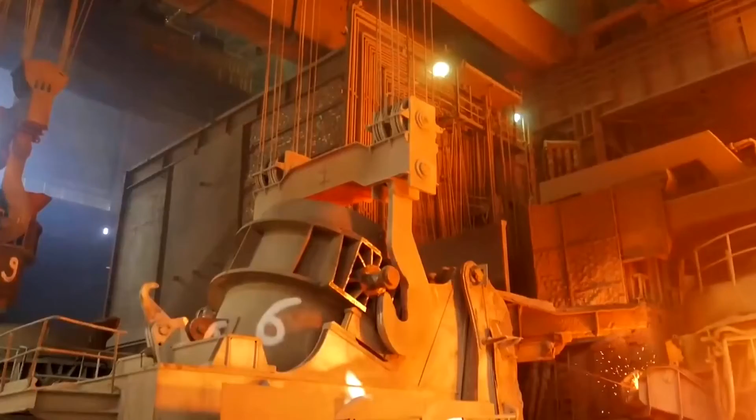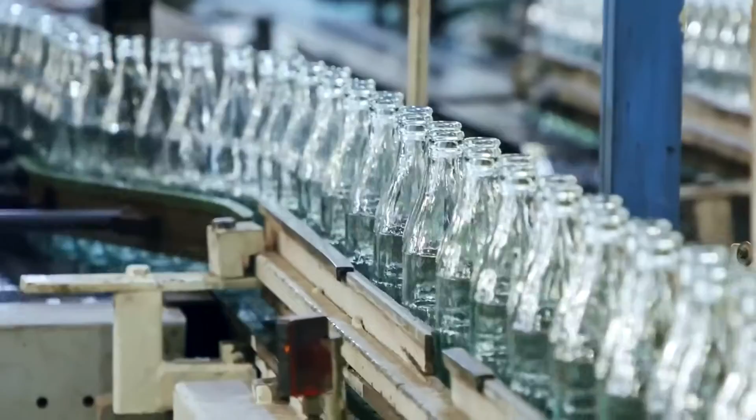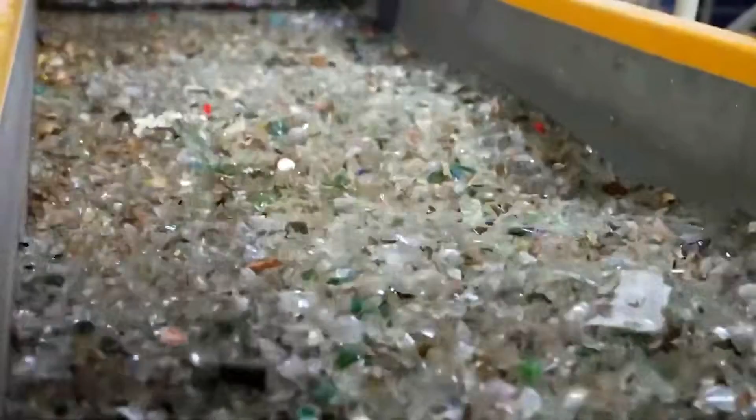But this material holds a remarkable potential. Glass can be recycled an infinite number of times, reborn again and again, without any loss of quality or purity. The process transforms a chaotic jumble of broken fragments into clean, shimmering new forms.

To understand how, we venture into one of the world's largest glass recycling plants. Within these walls, hundreds of tons of glass are given new life each day, revealing the incredible journey of one of our planet's most sustainable materials.

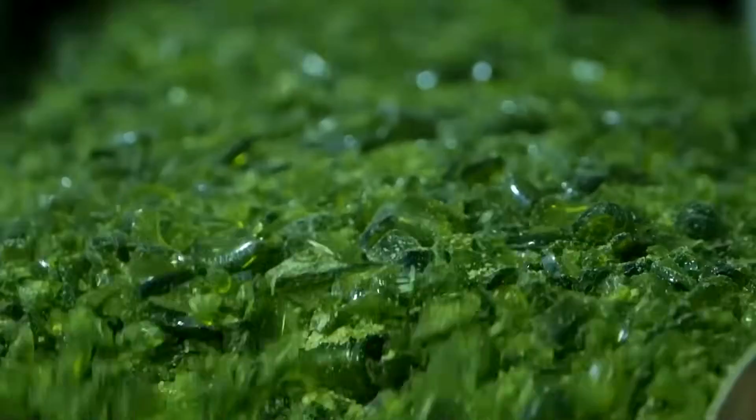It begins not in a factory, but on a city street corner. A single empty bottle, its journey far from over, is placed into an automated return machine. Across many European cities, this system elegantly solves the costly problem of sorting glass from household trash.

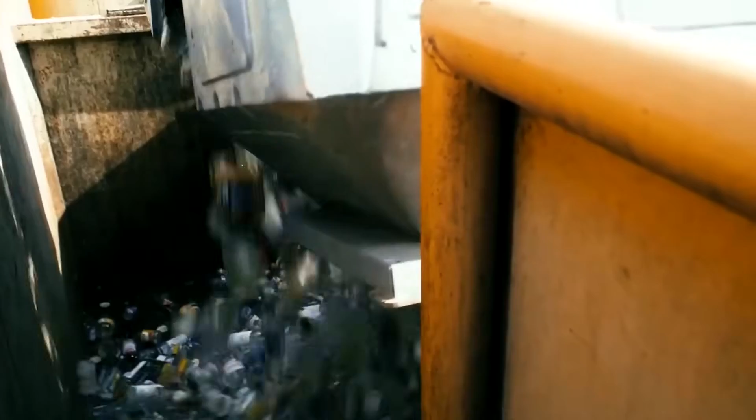The machine scans each container, sorts it internally, and issues a small refund, usually between 10 and 20 cents per bottle. A freshly finished drink is instantly transformed from potential waste into a valuable asset, creating a powerful incentive for public collection. This approach delivers a steady stream of pre-sorted, clean, and remarkably consistent glass directly to the recycling industry.

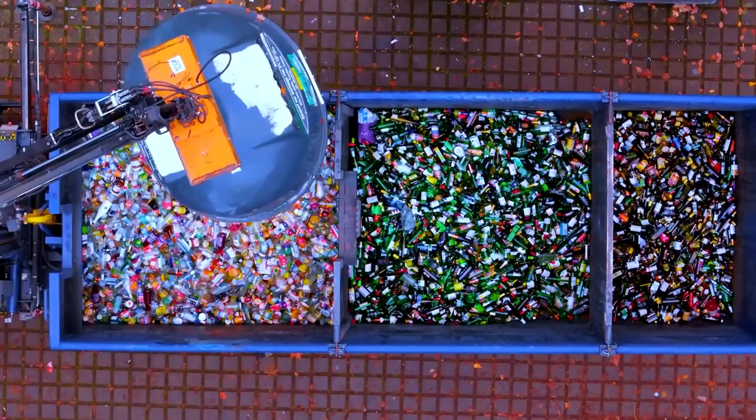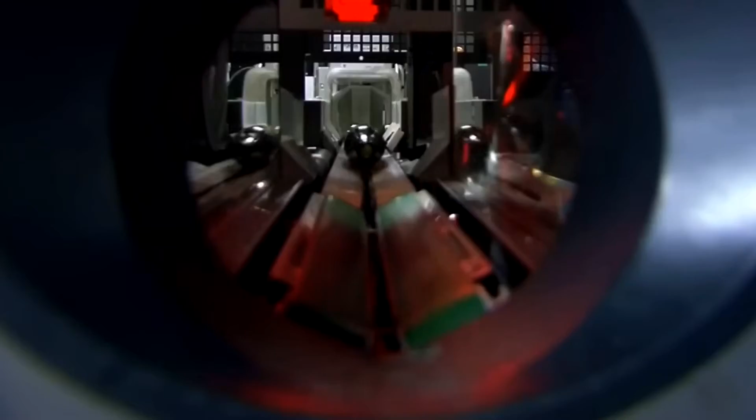Once these reverse vending machines reach capacity, specialized trucks are dispatched to collect the contents. Using forklifts, crews load large plastic bins, each one brimming with thousands of empty glass bottles, onto the truck beds. A single full-size vehicle can carry a payload of 20,000 to 30,000 bottles, a weight of about 10 to 12 tons of raw material.

Loaded with their fragile cargo, the trucks make their way from supermarkets and urban collection points to the recycling plant. Upon arrival, the drivers back up to a vast storage bay and release their load, sending a cascade of glass tumbling down onto the concrete floor. In moments, colorful mountains of green, brown, and clear glass begin to form, sparkling under the facility lights.

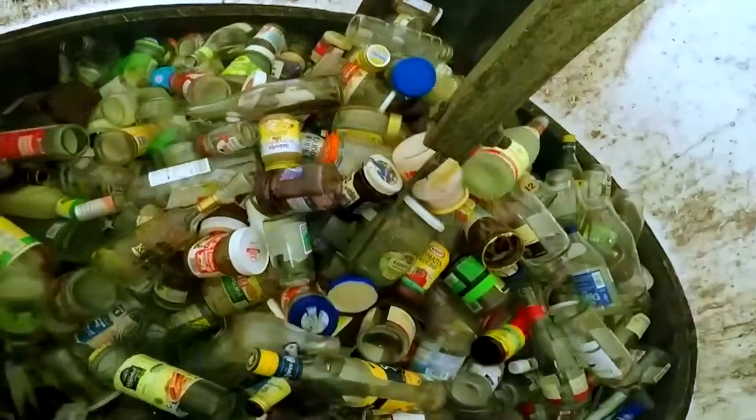These piles are not an endpoint, but the very genesis of the entire recycling chain. A raw material supply waiting to be cleaned and crushed. A mountain of discarded color and light awaits its violent rebirth. From towering piles, massive loaders carve out their share of the waste glass, hauling their heavy burdens across the yard.

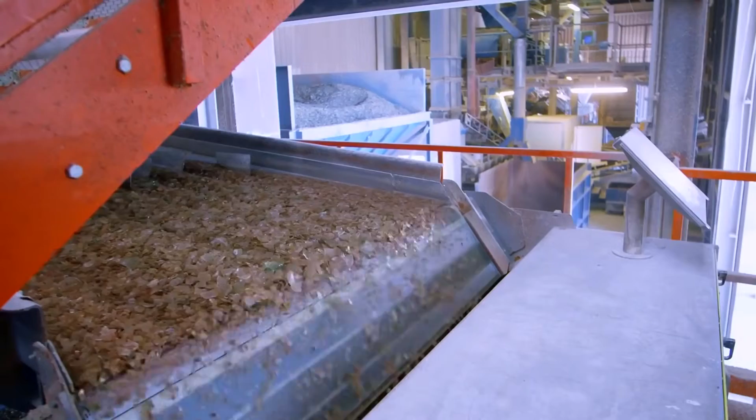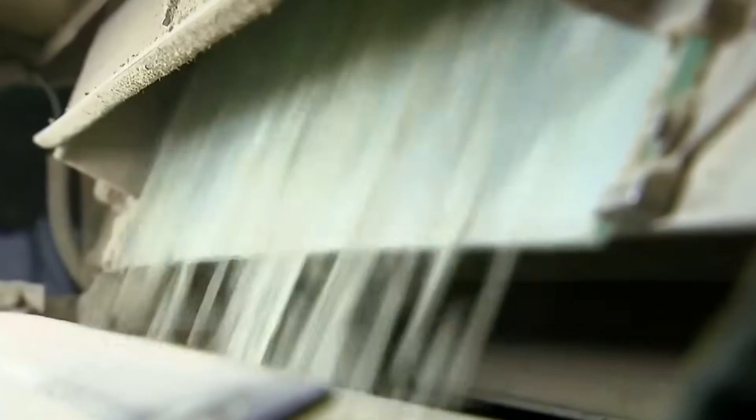The journey begins with a deafening roar as the glass cascades into the plant's feed hopper, sending a river of shards onto a steel conveyor. This stream of glass, dirt, and sand travels deep into the facility, where its first trial is a vibrating screen. Powerful oscillations shake loose the finest particles of dust and grit. Although the glass emerges cleaner, larger contaminants remain stubbornly mixed within the flow, requiring a different approach.

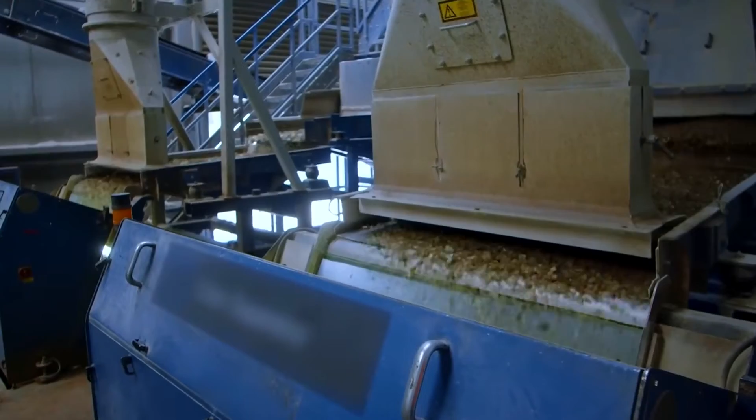Here, human hands take over where the machines cannot. Workers stand along the conveyor's edge, their eyes trained to spot and remove stray pieces of paper, plastics, and other foreign materials. This synthesis of mechanical screening and manual effort yields a purer batch, ready for the next stage.

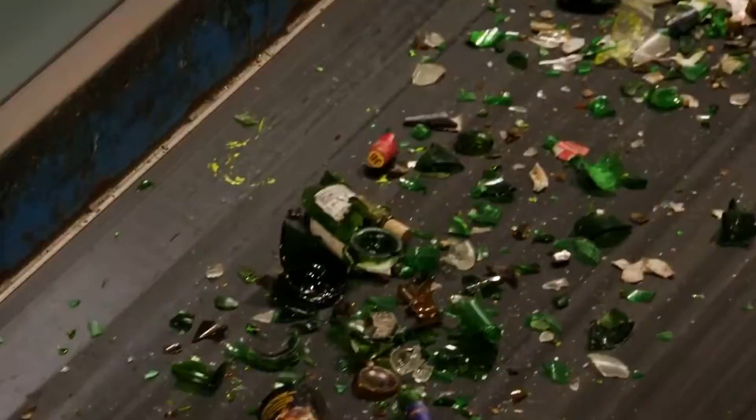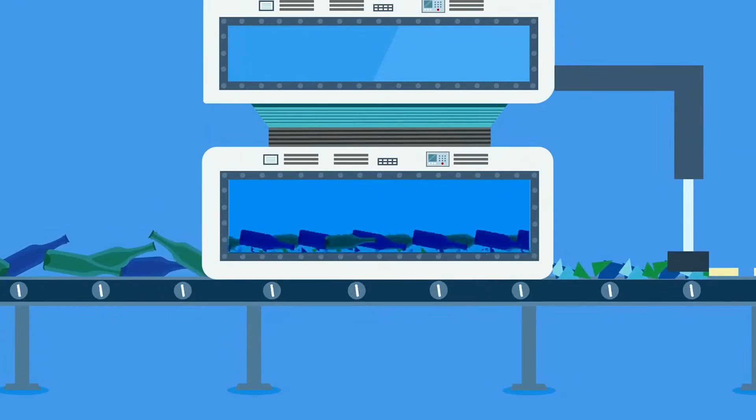But a more subtle impurity still hides among the fragments: countless metal bottle caps. A high-powered magnetic separator provides the solution. Its invisible field plucks the bits of steel from the stream as the glass tumbles onward, leaving the material approximately 80% clean. From here, the glass moves toward a crucial transformation.

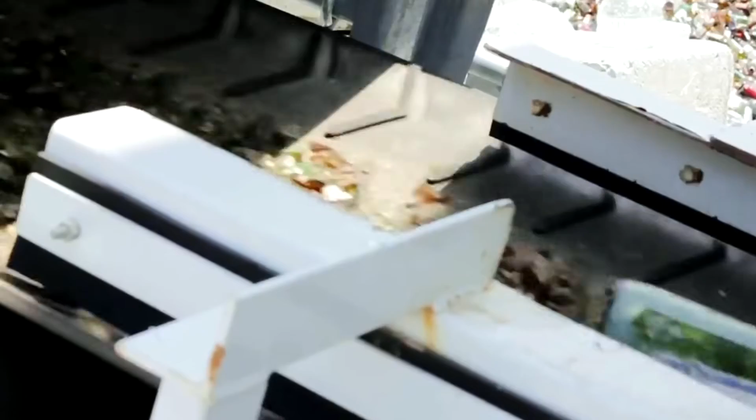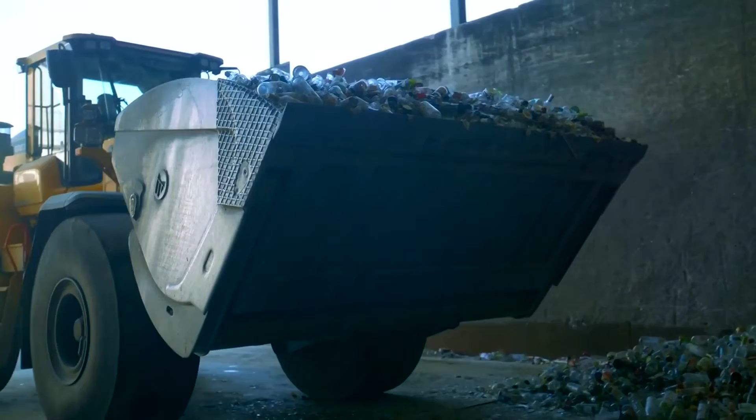Larger pieces are fed into a hammer mill, a colossal machine where high-speed rotating hammers smash the glass relentlessly, reducing it to tiny fragments. Any piece that remains too large is automatically detected and cycled back through the mill until it reaches the proper size.

This process ensures a uniform flow of fine, sparkling particles known as cullet, which looks almost like man-made sand. By breaking the glass down so small, it can melt much faster in a furnace, saving up to 40% of the energy compared to using raw materials.

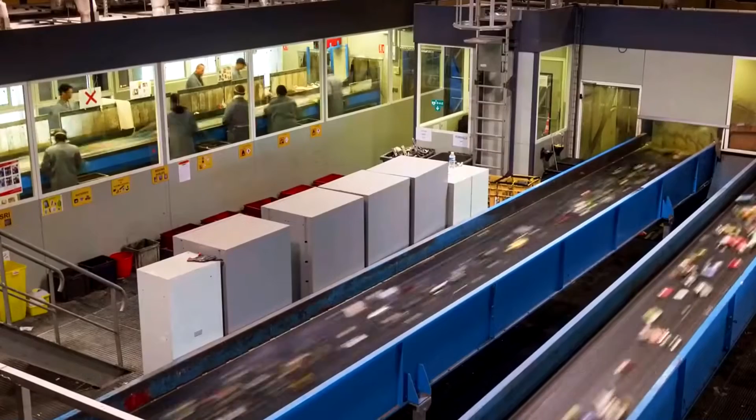The cullet is then carried into a powerful suction system, where it is blasted with a strong current of air. This airflow effectively strips away and blows off any lingering fragments of paper labels, polishing the material even further. Finally, the cullet enters the optical sorting system, the most precise step of the entire operation.

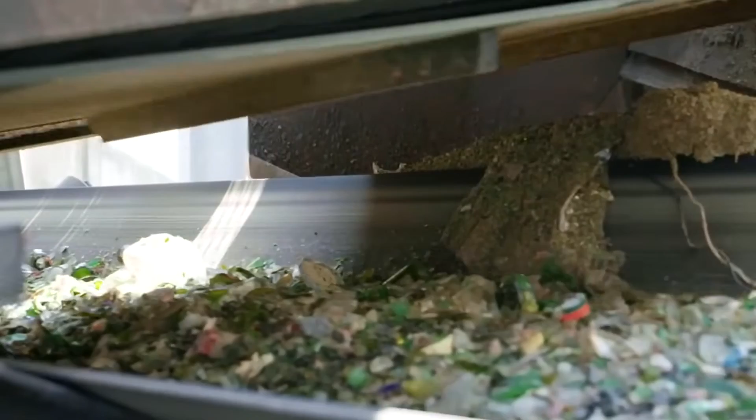As the glass pours downward in a shimmering cascade, laser sensors continuously scan each tiny fragment, identifying its exact color and composition. The moment a shard of brown glass, green glass, or even a stray piece of ceramic is detected, the system fires a precise puff of air, shooting the unwanted particle into a separate stream.

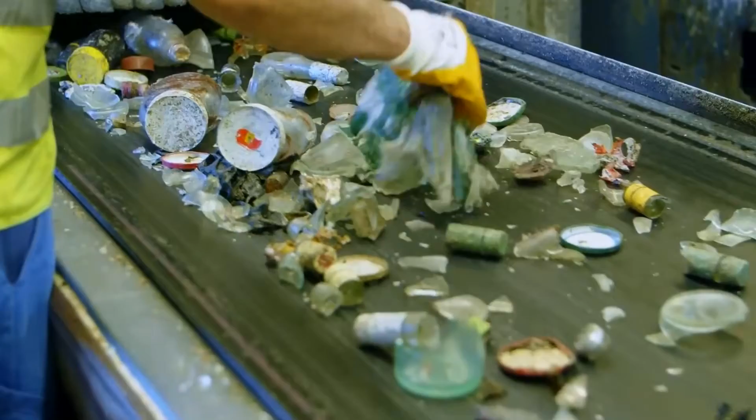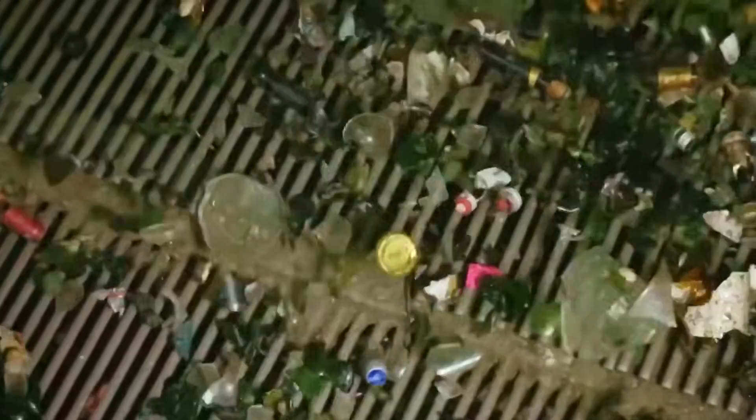The speed is astonishing, with tens of thousands of pieces processed every single minute, ensuring the cullet is sorted by color with near-perfect accuracy. Once sorted, the tiny glass particles continue along the conveyor belt. They are directed into separate storage areas, divided by color, where they form massive stockpiles. There they wait, glittering mountains of material ready to be transformed into brand new glass bottles.

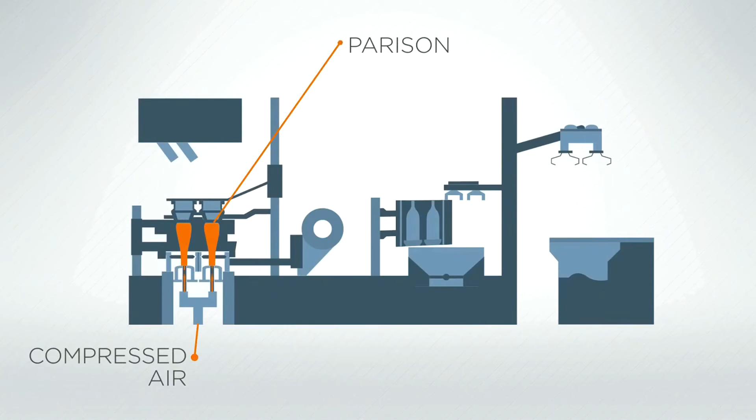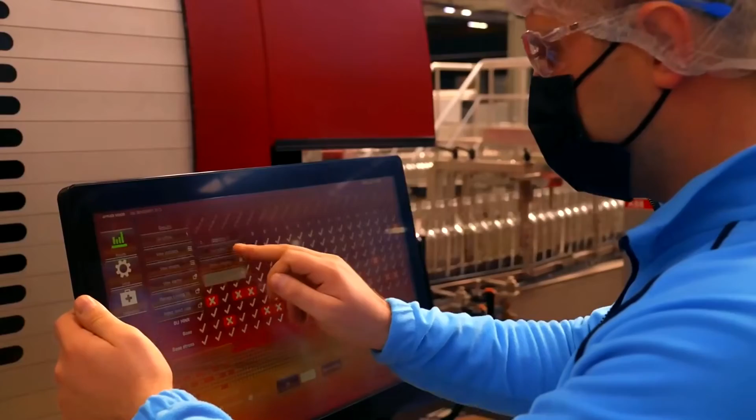It is a substance born of sand, yet it cannot be made from sand alone. Before these ground fragments, known as cullet, can enter the furnace, they must be carefully blended with other raw ingredients. The foundation of the mixture is pure silica sand, the element that grants glass its signature clarity. To this, soda ash or sodium carbonate is introduced, a key component that lowers the melting point and conserves energy throughout the entire operation. Limestone joins the blend as well, lending strength and stability to the final formed glass.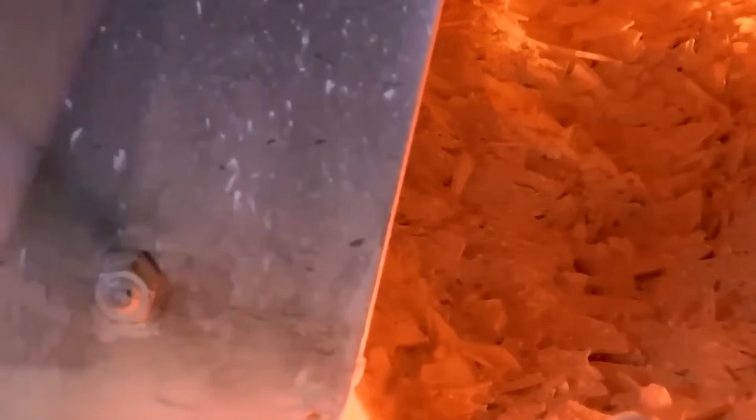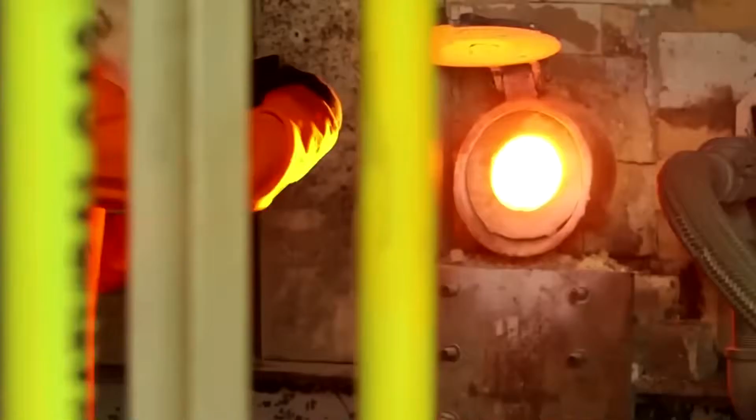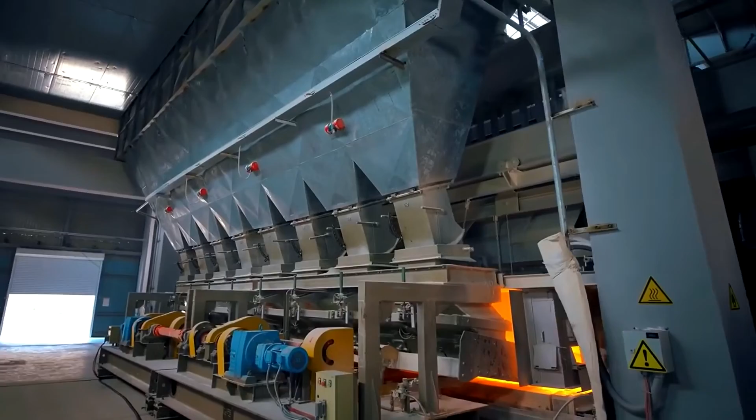Depending on the desired formula, manufacturers might also add dolomite, alumina, or metal oxides to fine-tune the color and physical properties. Yet the most vital ingredient remains the recycled cullet, which can constitute anywhere from 20 to 70% of the total batch. Its presence allows the melt to flow more quickly, reducing energy demands by up to 40% compared to using only virgin materials. In fact, increasing the cullet content by just 10% can lower energy consumption by about 3% and make a significant cut in carbon dioxide emissions.

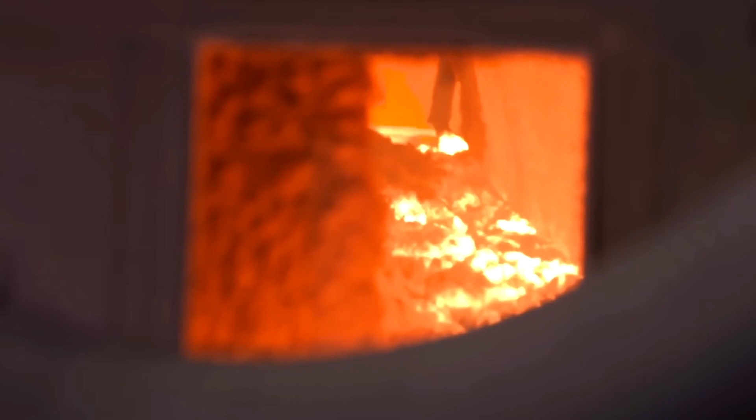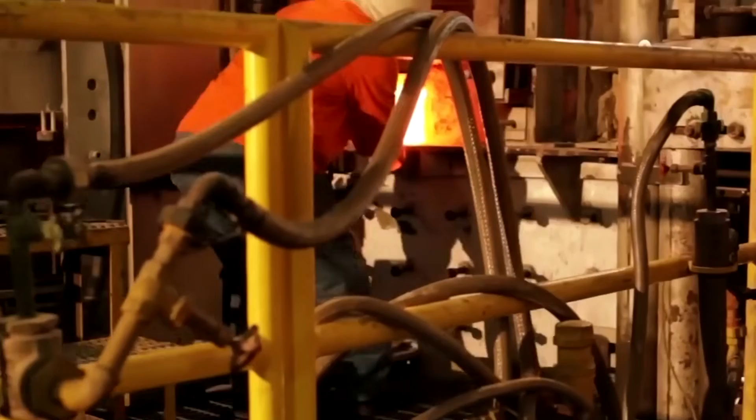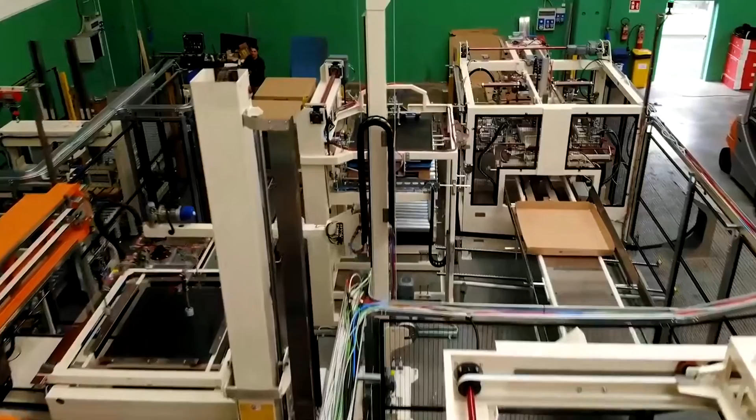Following precise factory specifications, the components are mixed until perfectly uniform, creating a batch ready for the inferno. This blended material is then fed into a massive gas furnace, where the atmosphere rages at approximately 1,750 degrees Celsius, a heat that surpasses molten lava. Technicians oversee the entire process, pouring the mixture into specialized crucibles. Within the facility, workers must be clad in fireproof suits and heavy gloves, as the surrounding heat, nearing 3,000 degrees, is almost unendurable.

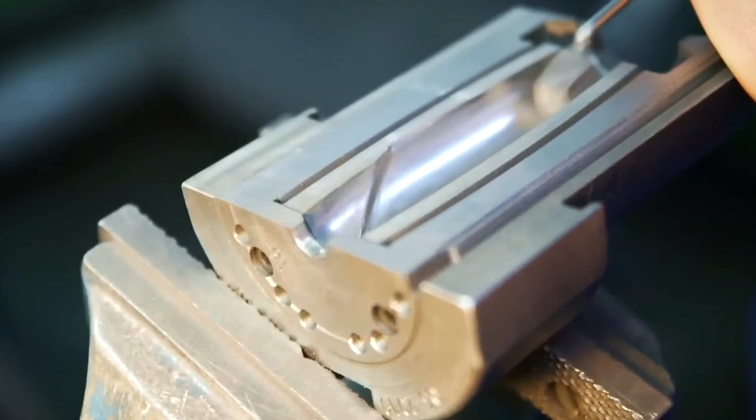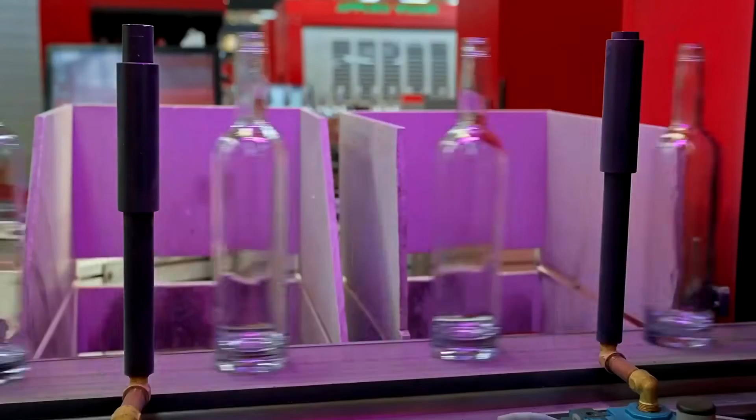Once the ingredients stabilize, the mouth of each crucible is sealed to maintain the extreme temperature and control the melt. After 24 hours, the mixture is no longer sand. It now flows with the thick, viscous consistency of lava. The brilliant radiance at the furnace floor is liquid glass, a dense, shining mass that has achieved the ideal temperature and viscosity. For the next 5 hours, the glass remains in this molten state, allowing any residual gases to escape and ensuring the utmost purity of the final material.

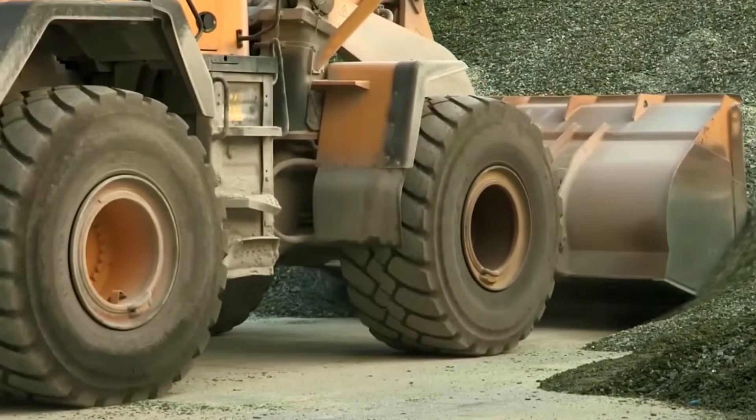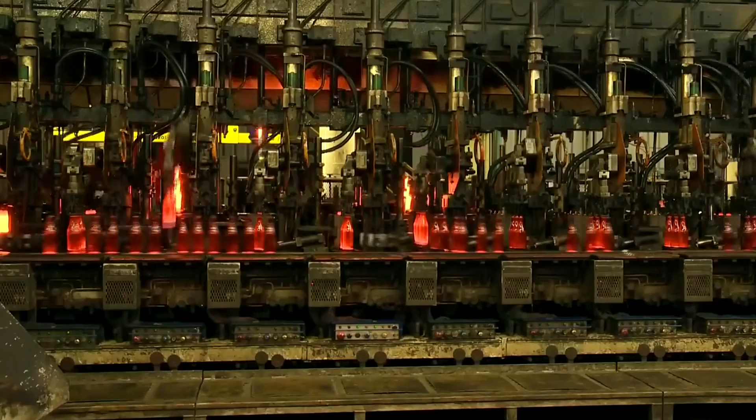To give this liquid fire a form, a mold is essential, making its creation the next critical step. Engineers employ advanced CAD software to design the mold with absolute precision, defining every line, dimension, and thickness to meet strict technical standards. From this digital blueprint, the molds are manufactured using cast iron or alloy steel, materials capable of withstanding temperatures up to about 1,400 degrees. These molds are then prepared to receive the molten glass and shape it from within.

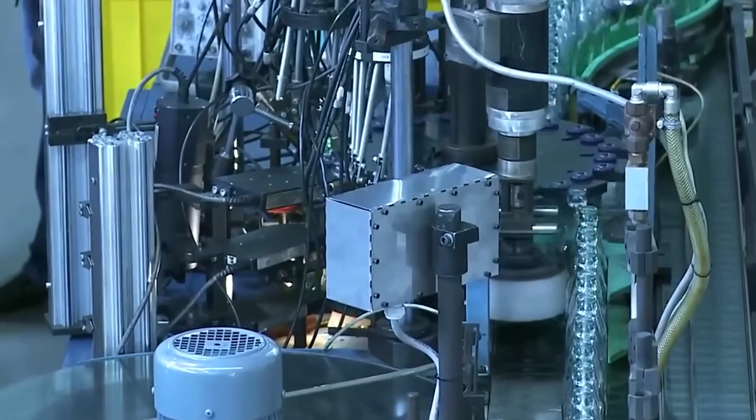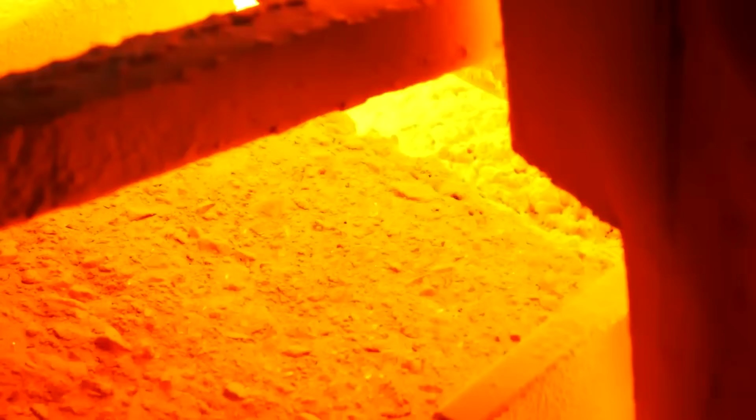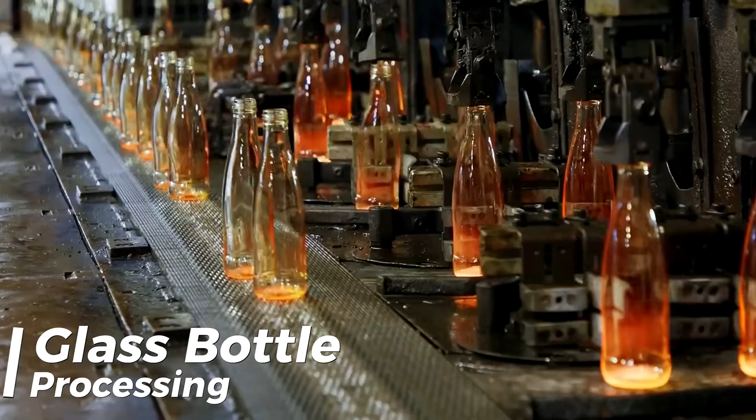Once completed, the molds are meticulously installed into the double-blow production line, one of the most reliable and widely used methods for forming hollow glass products like soft drink bottles, food jars, and pharmaceutical containers. The forming process ignites as gobs of molten glass are dropped into an initial blank mold. These gobs are sheared from a continuous stream of liquid glass, glowing at around 1,100 degrees Celsius, and possess the perfect viscosity for smooth and consistent shaping.

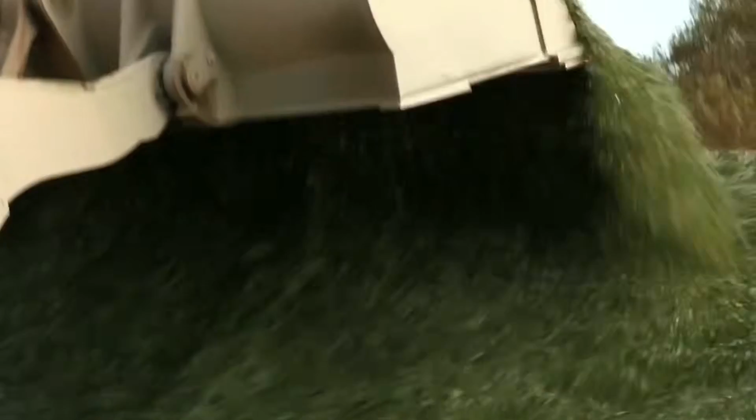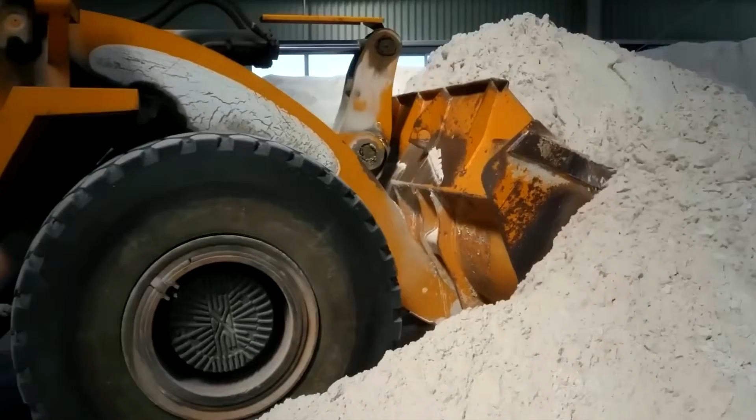Inside this preliminary mold, a jet of compressed air is blown from above, pushing the hot glass outward to conform to the mold's walls. This action creates the initial shape, a hollow bubble-like structure known as a parison, which already has a narrow neck. Still glowing with intense heat, the glass is gently transferred to the final mold, positioned just a few inches away on the same production line.

Here, a second burst of compressed air is shot directly into the parison center, stretching the softened glass until it presses tightly against every contour of the mold's inner cavity. In a matter of seconds, the bottle's full shape materializes. Though it appears effortless, behind the scenes, every valve and sensor is timed with incredible accuracy, synchronized down to 1,000th of a second.

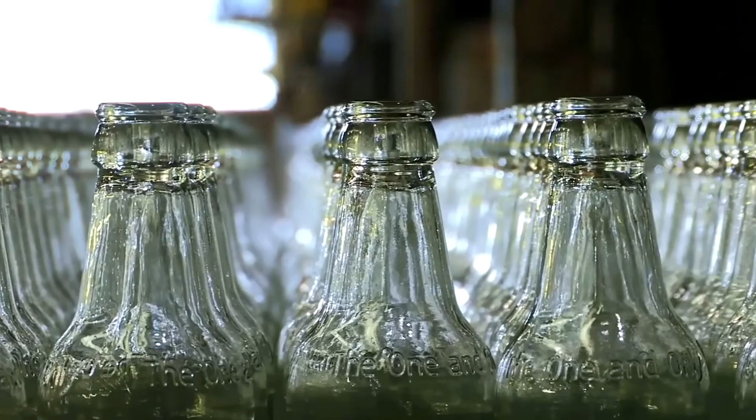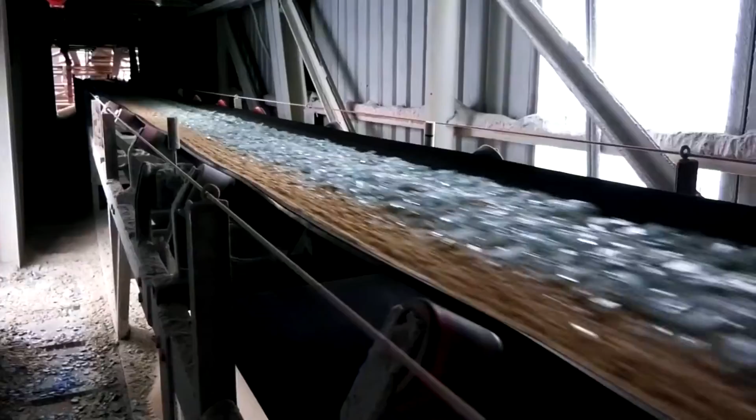This extreme level of control makes it possible to manufacture hundreds of thousands of bottles per day. Each one so nearly identical and flawless, they seem to have emerged from a single perfect mold. Freshly released from the mold, the glass bottles radiate a deep red heat, their surfaces shimmering in the dark as if they were glowing metal rods.

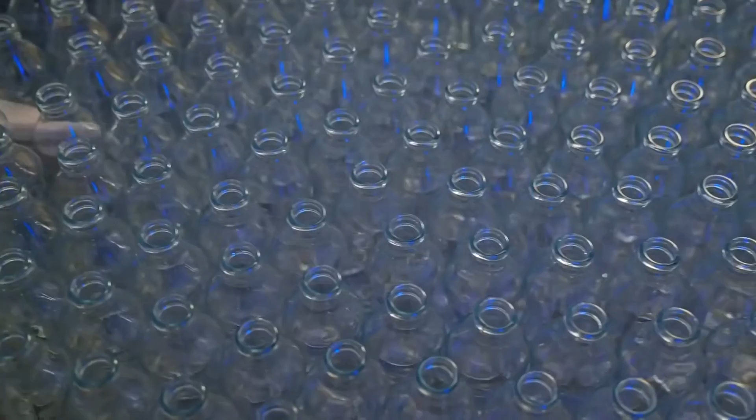Robotic arms then move with seamless, programmed precision, gliding effortlessly into place. Each bottle is lifted with care and set down onto a conveyor belt. The entire scene unfolds in a calm silence, perfectly synchronized and without a hint of haste. The conveyor belt slowly guides the newly formed bottles, their bases still aglow with heat, toward the cooling area.

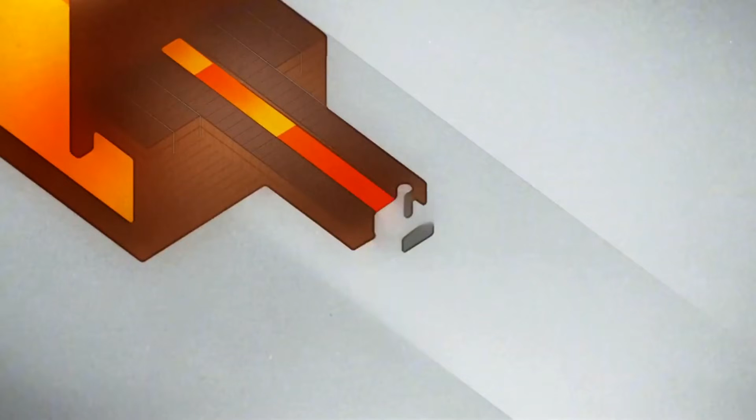They travel through a long yellow tunnel where the temperature is lowered incrementally, giving the glass time to settle safely without breaking. This careful cooling stage is unhurried, lasting for several minutes and sometimes extending to tens of minutes before it is complete.

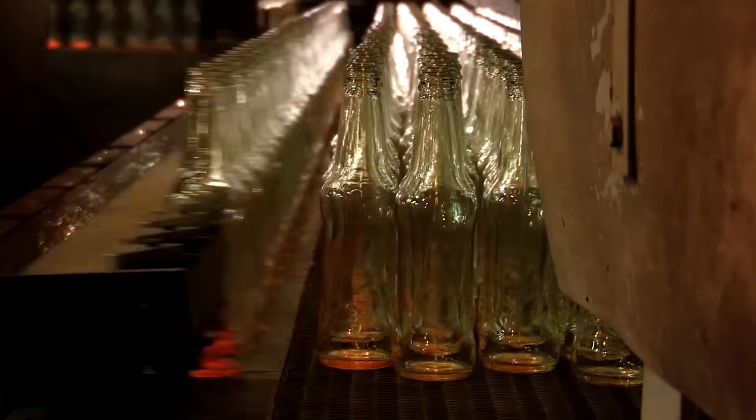As the process continues, the cooled glass bottles arrive at the inspection stage. Here, an array of optical sensors and high-speed cameras examines each one in real time. Every detail is checked, and the moment a defect appears, be it a crack, bubble, scratch, or even a tiny warp, the system immediately flags it and removes the bottle from the line.

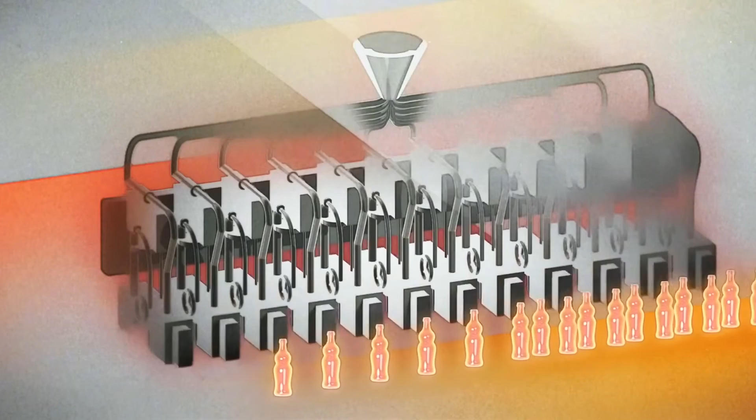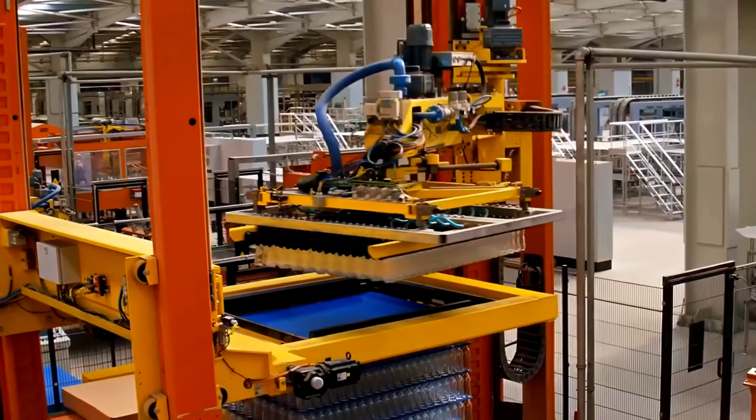The next stage focuses on a close examination of the bottle's mouth. Each one is rotated with precision by an automated system, while optical sensors and mechanical probes work in tandem to detect flaws, whether a chipped edge, a fine crack, or the smallest deviation in dimension. Only bottles that pass this strict check are allowed to move forward.

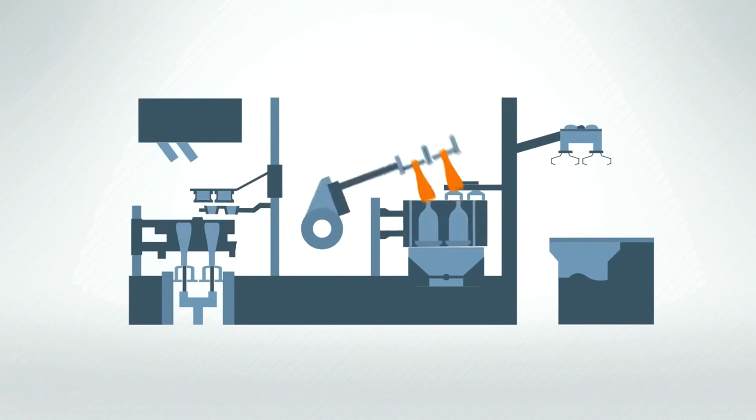After clearing all inspections, the glass bottles are carried to the palletizing section, where robotic systems take charge. Designed for accuracy and uniformity, these machines organize thousands of bottles with ease. A clamp mechanism with suction cups lowers, grips a full row, and sets it carefully onto the pallet layer. To protect against impact during handling and shipping, a sheet is placed between each layer.

When the stack is finished, an automated wrapper secures the pallet in film and tags it with a code corresponding to its production batch. Finally, the glass pallets are moved into storage, neatly stacked and ready for shipment. From there, they will travel across the globe, soon to become sparkling bottles, filled to the brim and ready to serve in every corner of daily life.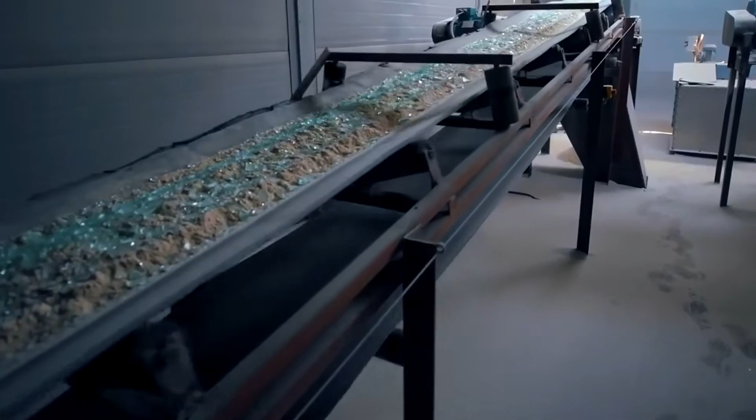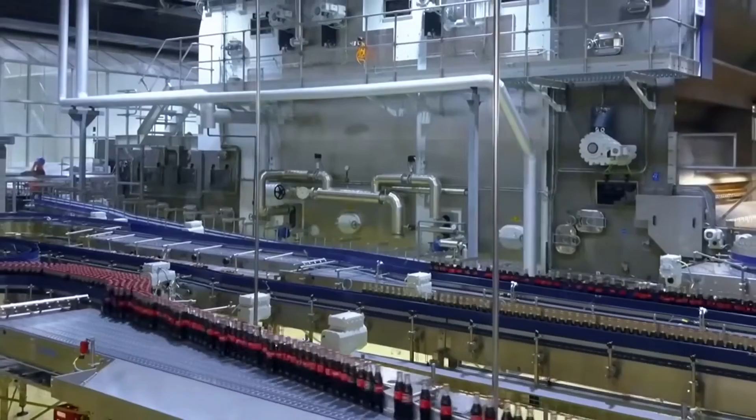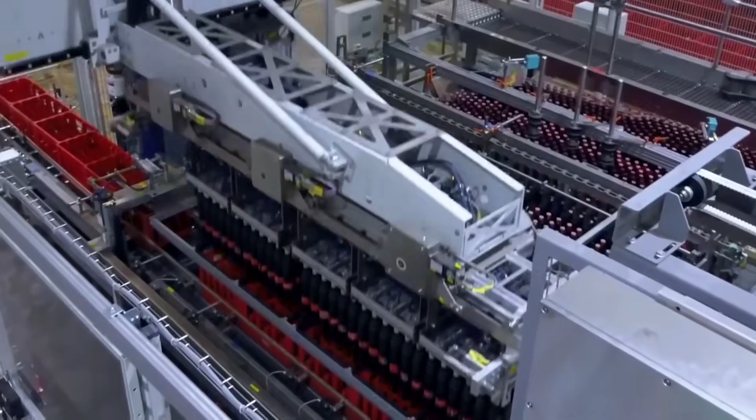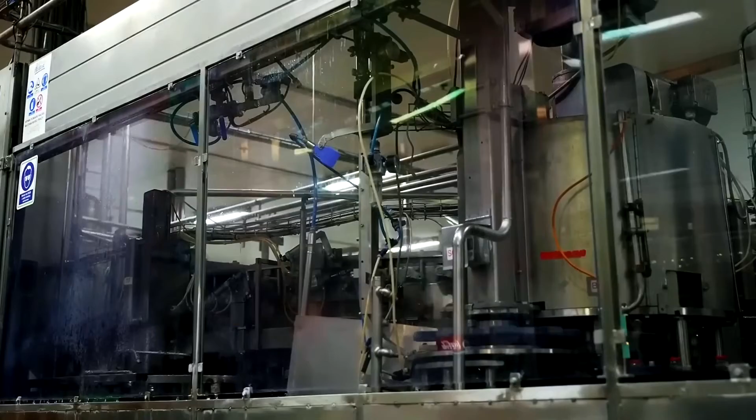It is a taste recognized across the globe, sealed within a vessel of iconic glass. But before this bottle reaches a single hand, it must survive a gauntlet of mechanical precision. The journey begins with a thorough cleansing, as high-pressure hot water and steam scour each bottle to eliminate any trace of dust or bacteria. They then move down a high-speed conveyor to the filling station, where automated nozzles dispense the famous soda with milliliter accuracy. At the same moment, an injection of carbon dioxide gas locks in the signature fizz.

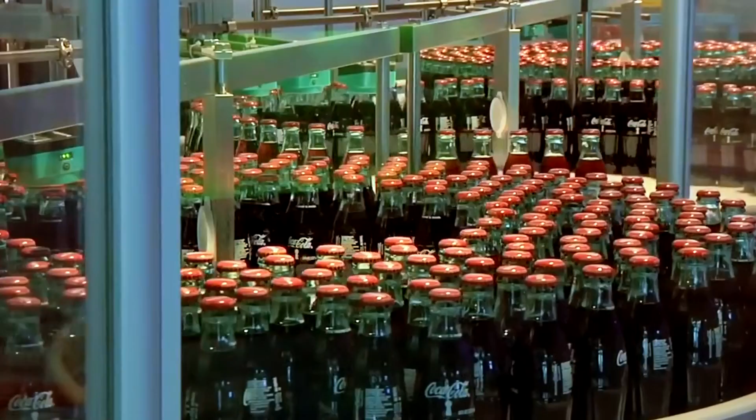Without pause, the bottles head straight to the capping station. Here, precision machines press crown caps firmly into place, a process immediately followed by a detailed inspection. High-precision sensors integrated into the line scrutinize each cap for tightness, guaranteeing a perfect seal that prevents even the smallest leak. Next, every bottle passes before a high-speed camera system, which checks for cracks, improper filling, or misapplied labels.

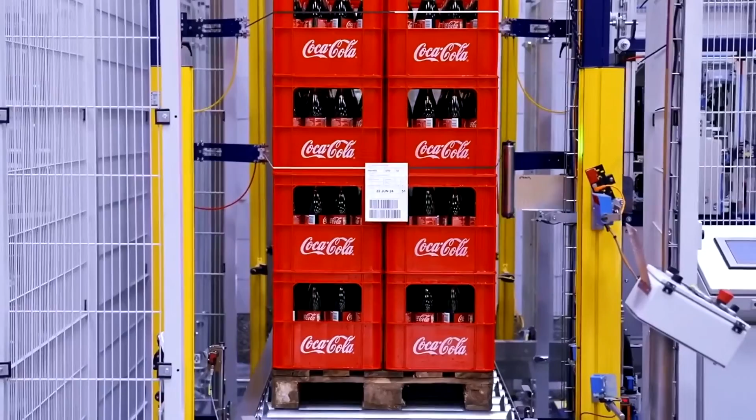The bottles glide smoothly onward, a programmed assembly in perfect formation, moving with a steady, precise rhythm. As they reach the water spray station, a high-pressure jet of cold water is aimed directly at the neck of each passing bottle. Finally, the perfectly sealed Coca-Cola bottles are packed into cartons, loaded onto pallets, and moved into cold storage. They now stand ready to be shipped to millions of stores worldwide, from small roadside shops to luxury hotels.

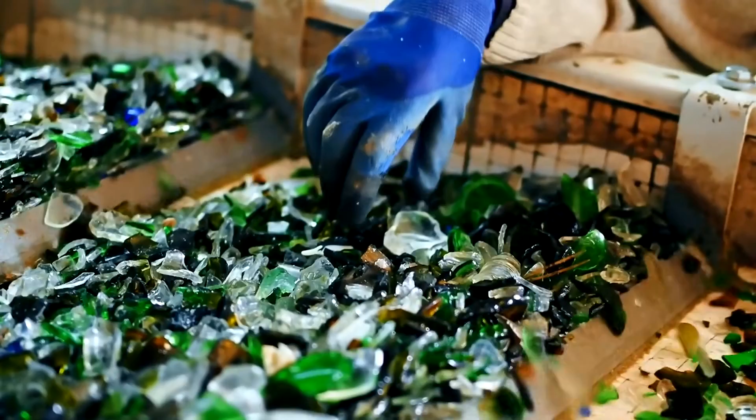What was once shattered and discarded now stands whole again, a testament to a remarkable cycle of renewal. From a chaotic collection of broken shards, a form of pristine and luminous clarity emerges, imbued with new purpose and inherent value. This transformation from waste into a perfect vessel is more than a victory for ecological balance. It is a quiet monument to human ingenuity, a process where industrial power and environmental stewardship find common ground, turning the remnants of our past into the foundations of our future.